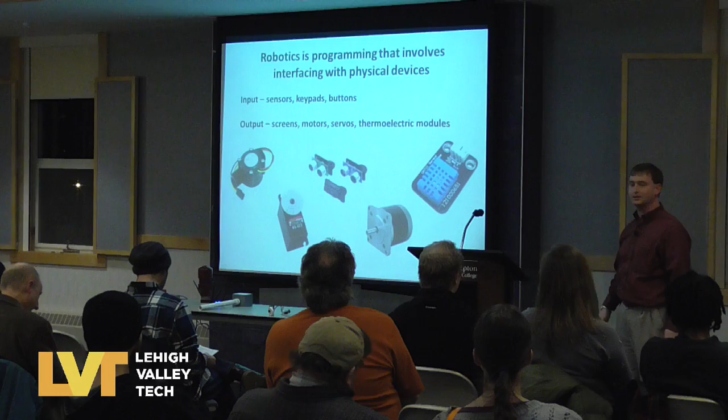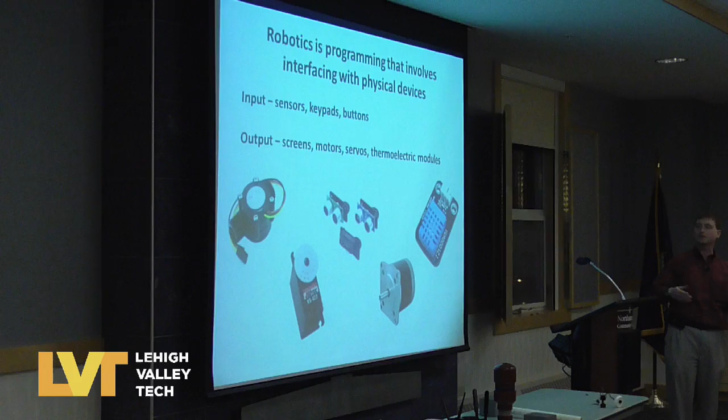So everyone a lot of times thinks of robotics as big arms in factories and crazy stuff moving around. But I like to think of robotics more as anything involving programming and interfacing with physical devices. So not only moving things around, but also sensing things as well. So on the screen here, for example, on the far left, that's actually a water flow sensor. In the middle, you have ultrasonic sensors.

Yeah, that might help. Thanks. No, you got a lot of those from the harp, right? Yep. All right.

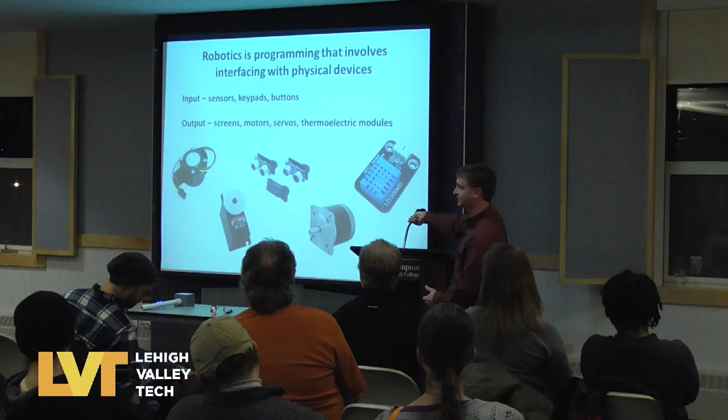This is actually a servo for moving things around, and this is a stepper motor right here. So you could do input in a variety of ways: sensors, keypads, buttons, getting data off the internet, and you can also output data in a variety of ways: screens, motors, servos, and I've actually used thermoelectric modules in some projects to keep water hot or cold.

So some applications, we always think of the robots in the auto factory putting together cars. You're doing the same thing over and over again. It's something that's very straightforward to program because there's not a whole lot of change involved from one car to the next. And you want very good consistency when you're in a manufacturing environment.

To something like the Asimo, where you got a little bit of artificial intelligence, some balance, a lot of different features and functions that need to be programmed in there, a little more complicated, responding to things on the fly. All the way down to smaller projects, such as this ultrasonic sensor that I designed to run low power on a set of batteries for a couple of years, and I actually have that sitting right up on the table. I can demonstrate that later this evening for you.

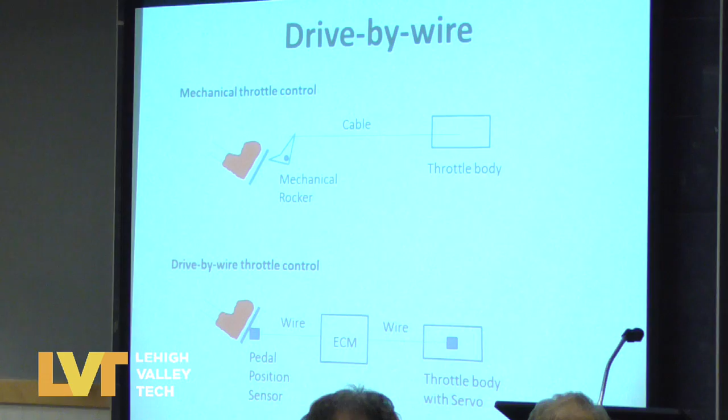And also for emissions control, you can change the opening and closing of the throttle body to change the way the engine's operating and make the operation a lot smoother. In case someone, for example, would stab the gas pedal, you can open up the throttle very gently instead of all at once and cause the engine to bog down or something goofy to happen.

Another interesting thing about robotics is the areas that you need to be an expert in. In traditional programming, you generally need to be an expert in computer software. And there are people that are great with this. Some people love programming 16 hours a day, getting very, very deep into it, doing one thing, and doing it very, very well. And I salute those people.

If you're into robotics, if you're the type of person that's maybe a jack of all trades, you do a little bit of each thing, a little bit of computer software, mechanical engineering, electrical engineering, microprocessors, and ethnography. Does anyone want to take a guess at what ethnography is? Okay. No? Ethnography is the study of people and how people do things and how people use things. And that's very important when you're designing anything, even when you're designing traditional computer software. You want to make sure it's something that people can intuitively understand and use, and it's not too difficult.

And the great thing about robotics is that you don't have to have a PhD in each one of these areas to be good. You just have to know the basics, enough to get by or to know what you need to look up to actually get something done. So in traditional programming, a lot of times the areas of importance you'll see: power, how many gigahertz the processor has, raw speed, security, redundancy, data encryption, and the user interface.

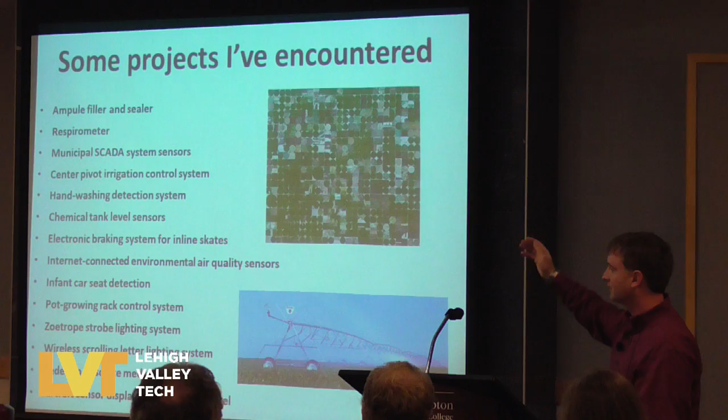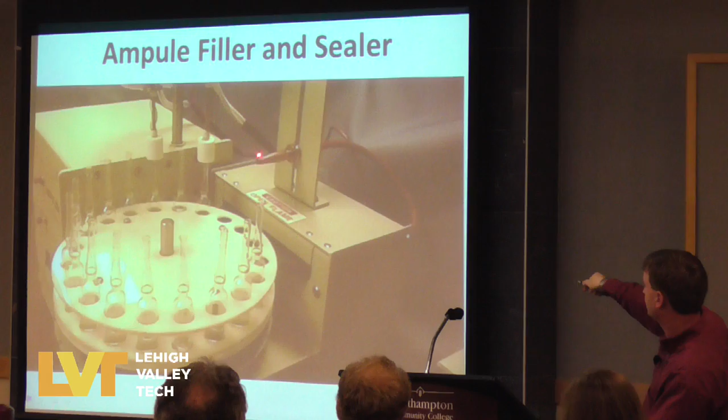Here's a video of the ampule sealer and filler. I'll just show it to you because it's much easier than explaining what it is. So these are ampules here. They're almost like test tubes, but they have very thin glass up at the top, and in a minute or two I'll show you there'll be a flame coming out of here, and the glass of those ampules will melt and form a hermetic seal.

This is the liquid filler and gas injection portion of the unit. So here's the liquid filler, and if it detects an ampule, it's going to push up the liquid filler and inject liquid into the ampules right before they get flame sealed.

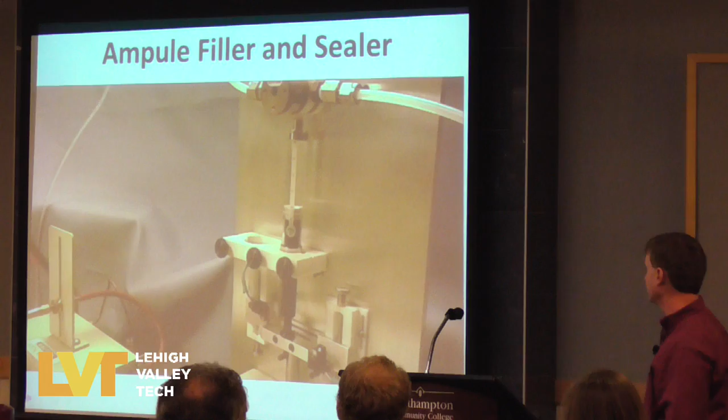And let's see, what's next here? Yeah, here's the flame. So they're forming a hermetic seal. If you notice, there's switches right here that detect if these guys have actually gotten onto an ampule, so that you don't go injecting liquid where there's no ampule.

And this is the base unit here, the one with the carousel rack and all the ampules. That has an Arduino board in it. This device here is used for purging gas, the one that goes up and down. The liquid filler's over here. The gas purge and liquid filler are getting Arduino boards in them as we speak. They're being redesigned for that.

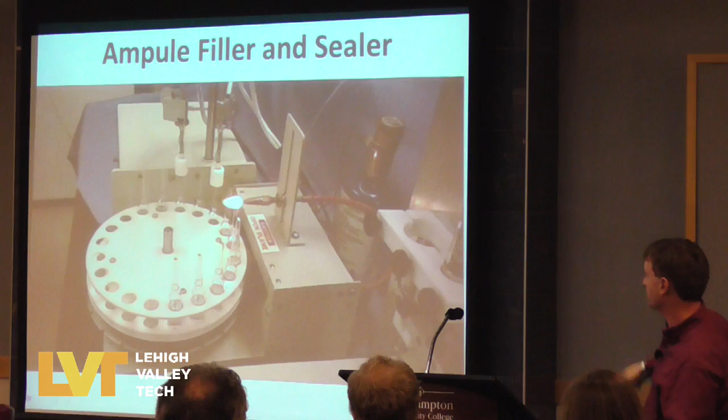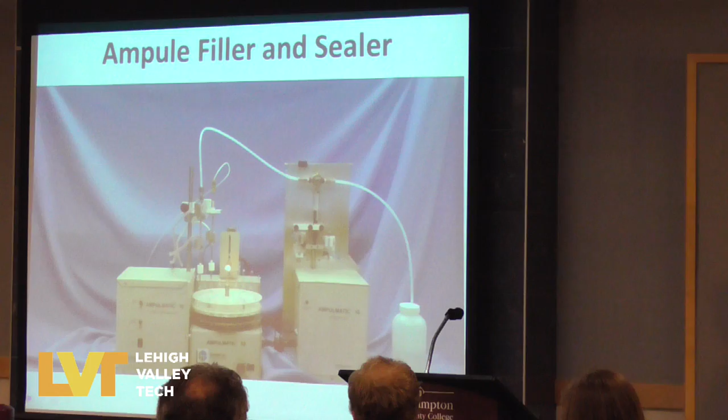But they're designed so that you can run either just the base unit here, and then you could buy the add-on modules separately if you like. See, there are cables going through them. And this is the whole thing in operation all at once. But the base unit is running on an Arduino using a very minor amount of the capabilities that the Arduino actually has.

And then there's my hand. Oh.

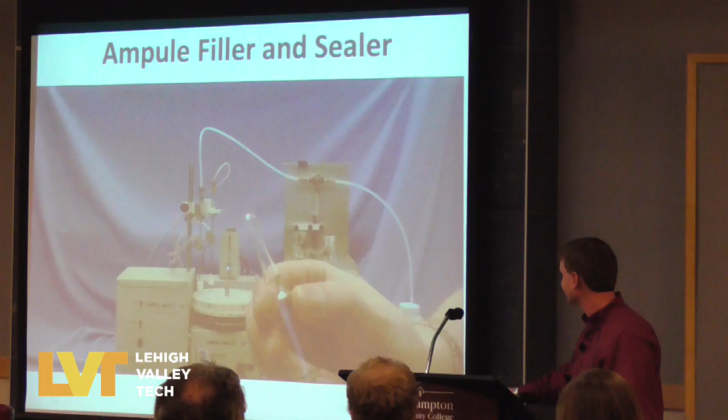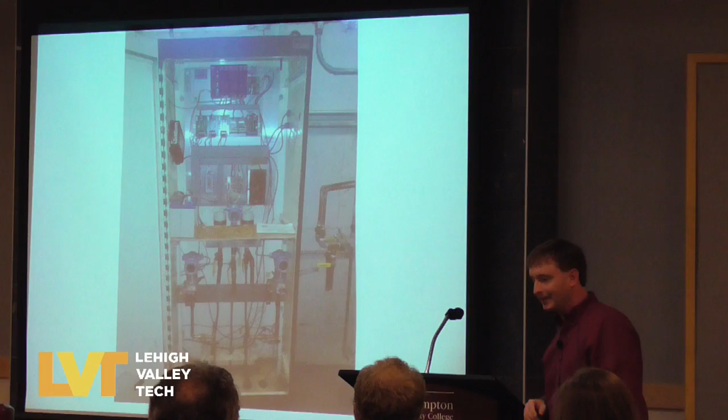And inside they have a PLC system to monitor the pressure and flow of their different lines. Some of their sensors are right here. So what we did was we built a board running on an Arduino Mini, which is right here, to monitor the current, because we want to compare what we can get for monitoring current with this little board here versus what they're getting with an expensive PLC system. And I have parts of that setup replicated up here.

This is going over Ethernet to a Cradlepoint device, and a Cradlepoint's a wireless device that you run on a cellular connection through AT&T or Verizon, for example, and then you can post data directly to the internet from wherever you are.

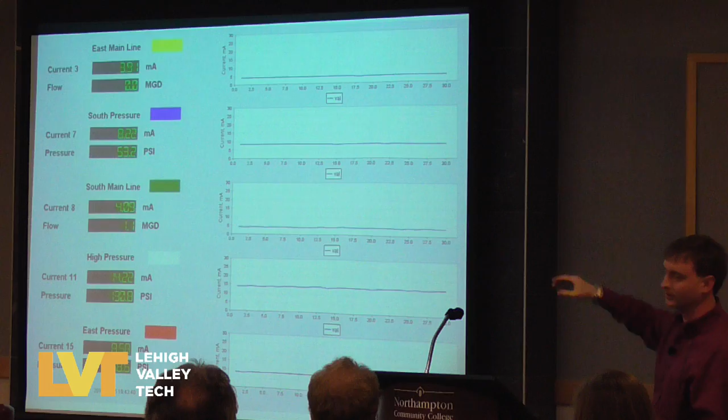And it looks a little better if you have an interface like this, so that you can see over time what's going on. You have a history, and it'll send out alerts if you need to, and make the appropriate reports that you'd like.

So the question is, why now? Why is now a good time for robotics? Why are we not talking about this 5 years ago or 10 years ago? And the reasons I came up with for why now is that the Arduino has become much more popular in the past couple of years because it's something that's very, very low cost. It's open source, and there's a lot of community support.

The microprocessors that they've been using, the technology's been around for years, but a lot of times, it was expensive to use in the past. The market was fragmented. Things were closed off, so you couldn't tell exactly what was going on. And it was very hard to find people who were actually using it, so there wasn't the support. You couldn't go ask a question as easily as you can with the Arduino.

And you combine that with the maker movement, 3D printing, and everyone wanting to build things. The robotics falls right in with that. And it's a rapidly developing field that can fill many unfilled needs based on some of the interesting calls that I get for projects. There's a lot of stuff that you can do now that wouldn't have made sense to do before because you're able to do things at a smaller scale and much lower price.

So a little bit about the Arduino. Has anyone here ever heard of or used the Arduino?

Okay, good. Some of the things that make it nice are, one, it's open source hardware. So you can buy the stuff already pre-built, which a lot of times makes sense, but the schematics are provided by the manufacturer if you wanted to build it yourself or if you're worried about the people who are making it going out of business. The IDE is open source and it's available on most operating systems. It's very simple to install.

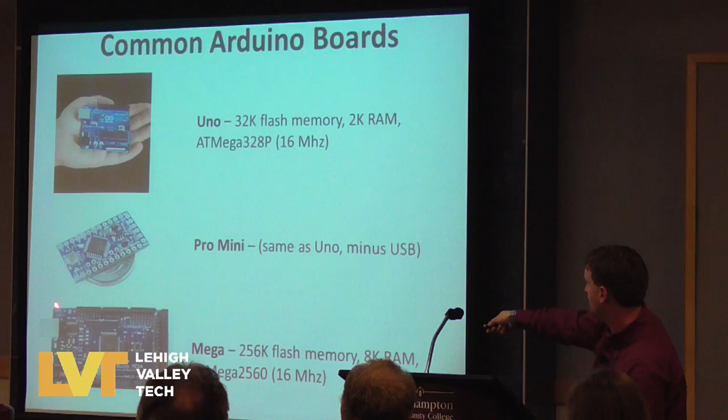But if you need more power, more inputs and outputs, more memory, you can go with a Mega. It costs a little bit more, it takes a little bit more power, but the opportunity's there. You see it has a lot more pinouts, and sometimes that's necessary. So here's a close-up of the Uno.

What you can do is digital inputs and outputs. So any one of these pins here, 0 through 13 and analog 0 through 5, can tell you whether any value coming in is high or low. You can do analog input on an analog pin. So if you have a voltage between 0 and 5 volts, it can tell you what voltage that is. It can do serial communication just like a modem with some libraries. So you can communicate with a whole bunch of different things, Ethernet boards, wireless boards, other Arduinos.

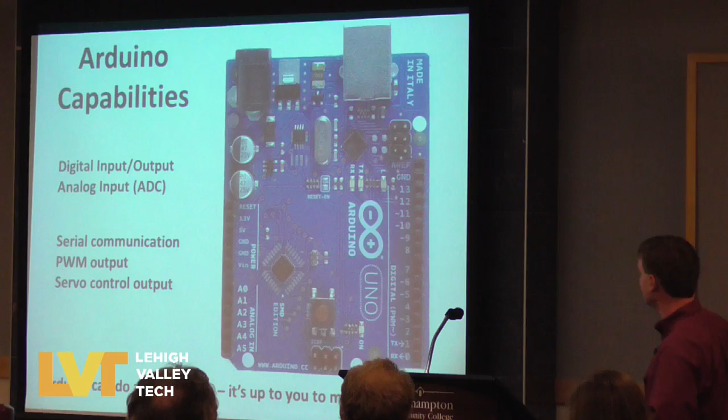Any of these pinouts with a little tilde in front of them, 11, 10, 9, 6, 5, and 3, can do PWM output, and I'll explain that in a little more detail later. And along with PWM, you can do servo control output to control servos. There's a timer in the microprocessor, a couple of timers actually, that control all the functions, making sure that the pulses happen at the right times and the serial communication happens at the right times, giving you that functionality. So it can do a lot of things, but it's really up to you to make it happen.

The Arduino community also has a lot of shields available to make it easier to develop. A shield is a board that matches up pin for pin with the Uno, and you can just slap it on and sandwich it on without doing any other wiring or connection whatsoever. And most of the time they have the drivers with them so that they're very easy to use. You don't need to write a whole bunch of code by yourself or deal with the very intricate communications of each of these pins to make things work. And the nice thing is, once you stack a shield on, you still have all the pins out there, so if you need to put other things on, it'll just pass right through to the baseboard.

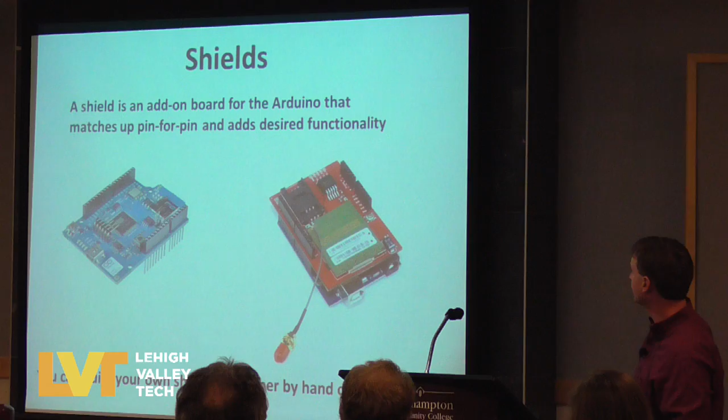And you can also build your own shields, either with a prototyping board if you like to do soldering, or if you have to do a production run of 10 or 20 shields, you can develop a PCB in free software, and either you can probably make it at the FabLab here in a CNC machine, or you can send it out to a place like PCB Express and pay your money, and they'll mail it to you in a week.

Other components you can interface with anything you want. If it's electronic, you don't have to buy special Arduino stuff. You can interface with relays, MOSFETs, solenoids, and the same sensors we saw on the third or fourth page: water flow sensor, ultrasonic sensors, infrared, servo, stepper motor, and the temperature and relative humidity sensor.

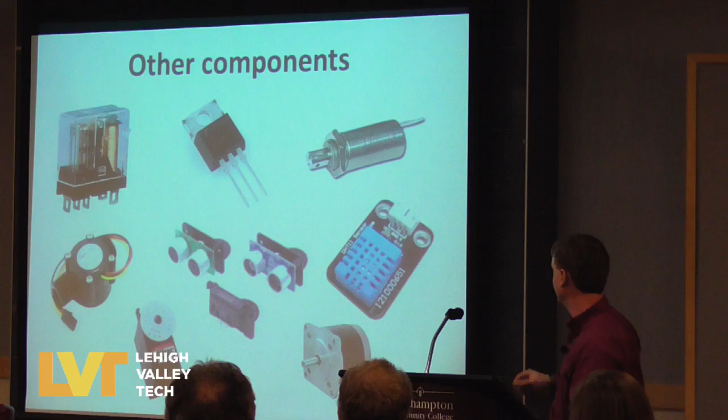As I said before, most of the shields, and actually a lot of components, have drivers available which allow you to just use basic functions that the manufacturer or someone in the open source community has already made, to make it very easy to get what you want out of the units instead of having to delve into the details. The nice thing is most of the component data sheets actually have the interface specifications on them.

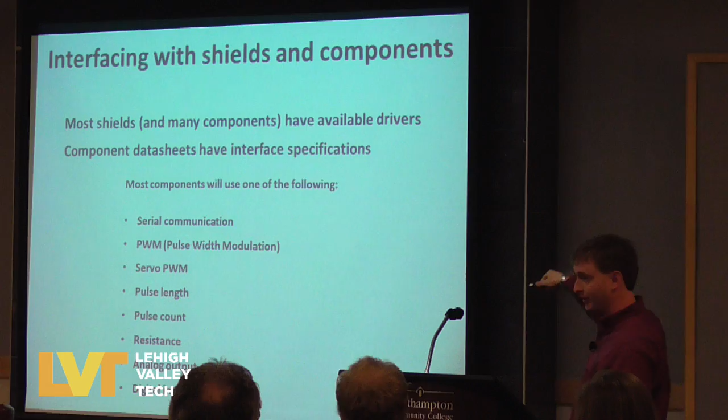Just about everything will use either serial, PWM, servo PWM, pulse length, or a pulse count, for example if it's measuring a flow, or like a Hall effect sensor for a wheel spinning rotation, resistance, an analog output, or a digital input or output. Like, for example, a button that's on or off will give you a digital I/O.

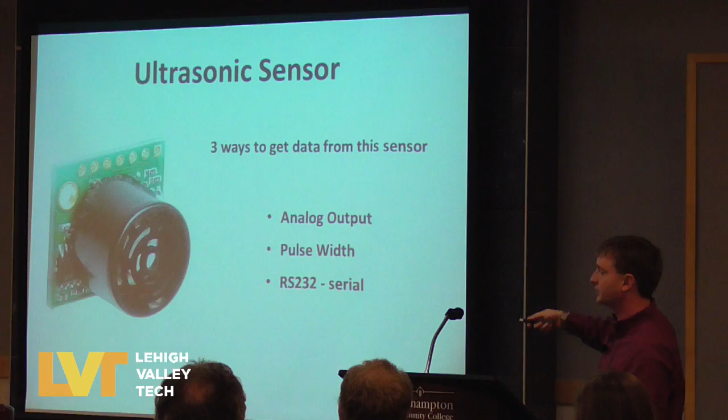One of my favorite sensors here, this particular ultrasonic sensor comes from MaxBotix, and it's actually the same sensor that I have here encased in epoxy. One of the neat things about this one is there are actually 3 ways to get data from this sensor. It'll give you an analog output, pulse width, or actual serial communication.

So here's an example of what the data sheet would tell you about the sensor. It says you got to provide power in, VCC. You'll hold pin 4 high to start sensing. Pin 3 will give you an output, a voltage. It'll level off at some point, say maybe 3 volts, and that'll correspond to some sort of distance.

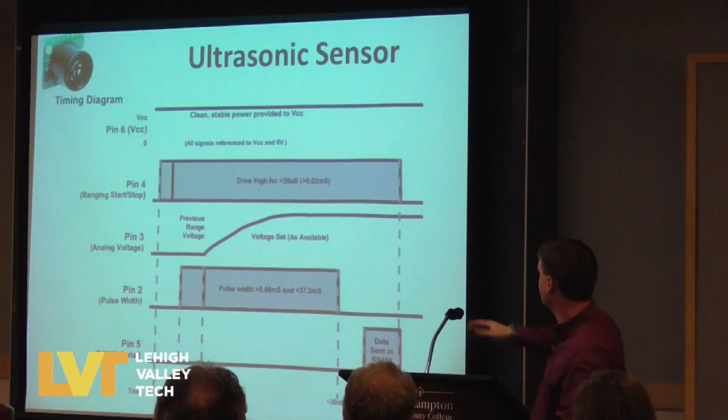Or if you read pin 2, you'll get an echo, and it'll give you a length, and the time that this is high corresponds to the distance between your sensor and what it's sensing. Or if you wait till it starts sending serial data, it'll send your data in serial format so you can read that as well. Sometimes you don't have any analog voltage and analog in pins left over, so maybe it's easier to use the pulse length. And sometimes you want to use the serial, if you have extra resources, or you want to make sure you're 100% accurate, because sometimes you can get a little bit of variation in the other two, depending on the timers or the voltages.

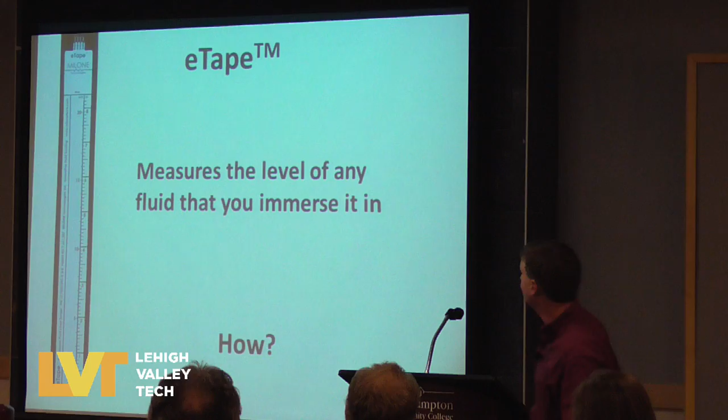Another very interesting sensor, definitely not developed just for the Arduino, is called eTape, and it measures the level of any fluid you immerse it in. We actually got some of it right here. This particular one is 12 inches long, but they can print it in any length they want. This is actually 3D printed. So the question is, how does this work?

The eTape has 2 resistance elements in it. It has a reference element because resistors can change their resistance depending on temperature, and you could be using this in a wide variety of temperatures. Then it has a sensor element, which is a resistance that changes with the fluid level. The data sheet tells you that if you sense the resistance, for example, as 1.5 kiloohms, that corresponds to a liquid level of 5 inches. So you just dip this in water, measure the resistance, and back calculate how deep the water is.

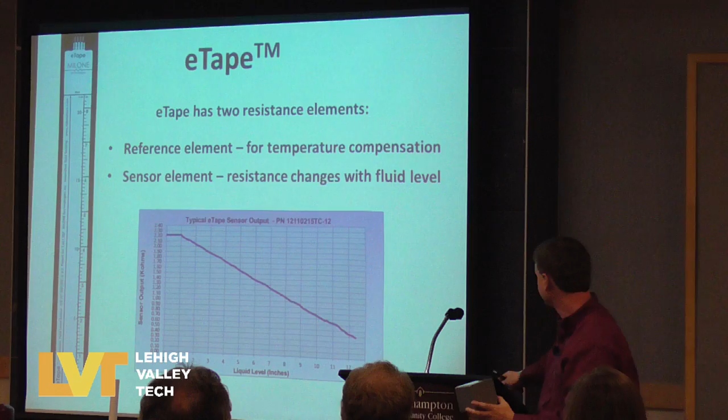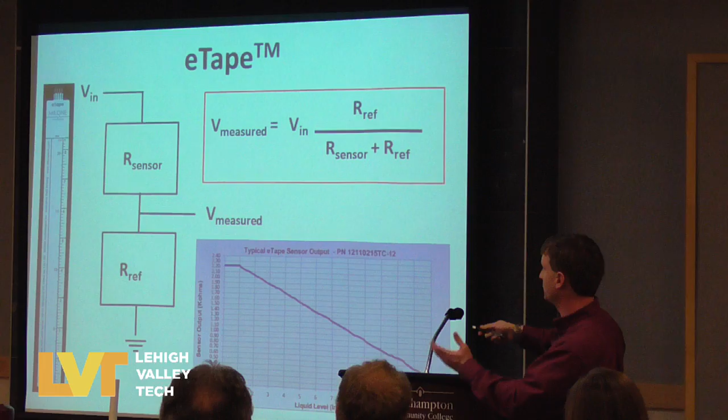Here's an example of a schematic you might use when building electronics for it. This is a very simple voltage divider. There are many ways to do this, you can use op amps, you can use Wheatstone bridges, but this is one of the simplest things you can do. That relates to this equation here: you know your reference resistance, you know your Vin, you measure V measured, and based on that you can calculate what the sensor resistance is, then go back to this graph and figure out what your liquid level is.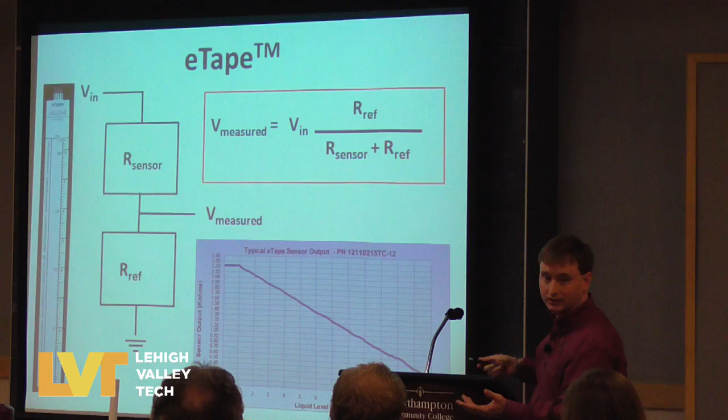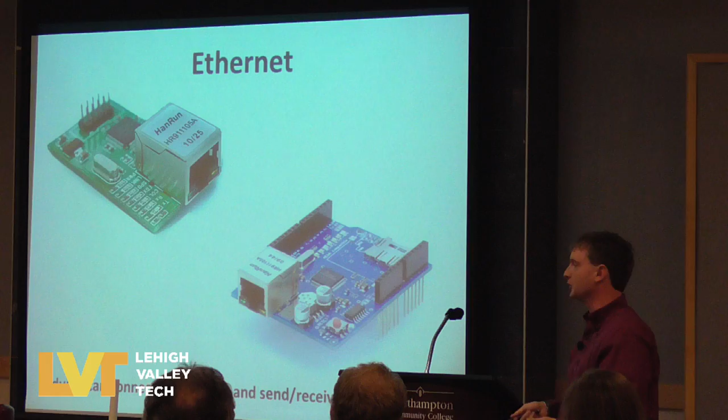You can also hook up to Ethernet LANs really easily by using a module like this or a shield, about 10 or 11 bucks. The official Arduino shield's a lot more expensive, but has room for an SD card and is a bit more capable. So you can connect to your LAN and the internet, send and receive HTTP requests. If you want to put data on a database or look up data on the internet, you can do that with one of these.

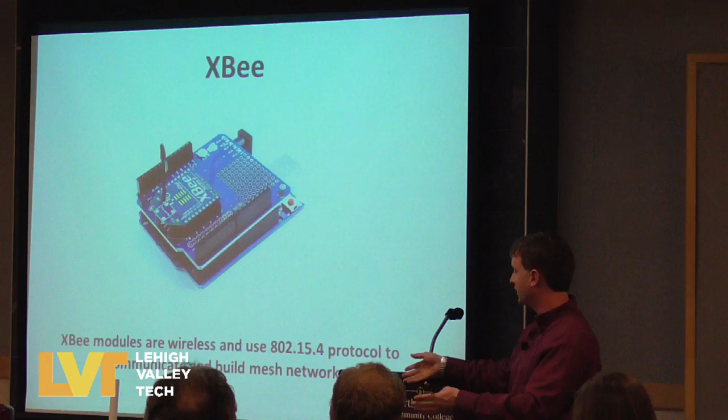If you want to do wireless communication, you can use something called an XBee, and I have one right here on this wireless sensor. Little shield, looks kind of like a blue stink bug, but not as bad smelling. It uses the 802.15.4 protocol to communicate, and you can build mesh networks. These guys can go about 300 or 400 feet line of sight, but if that's not enough, you can put a repeater, another XBee, and start hopping to build a mesh network with up to 10 hops. So you could have them go throughout the whole building, each communicating with the next one it can reach, and the data will still make it back.

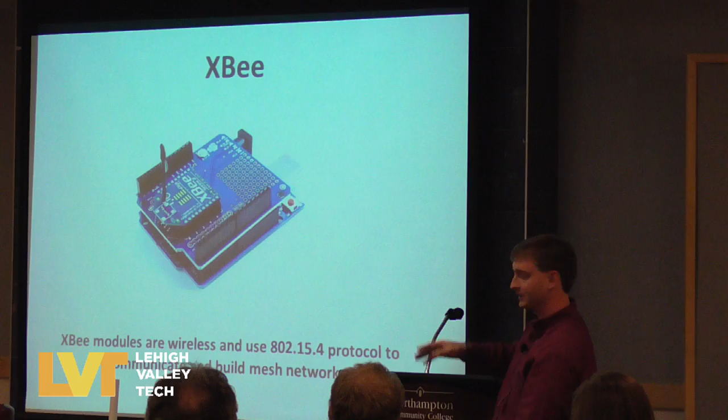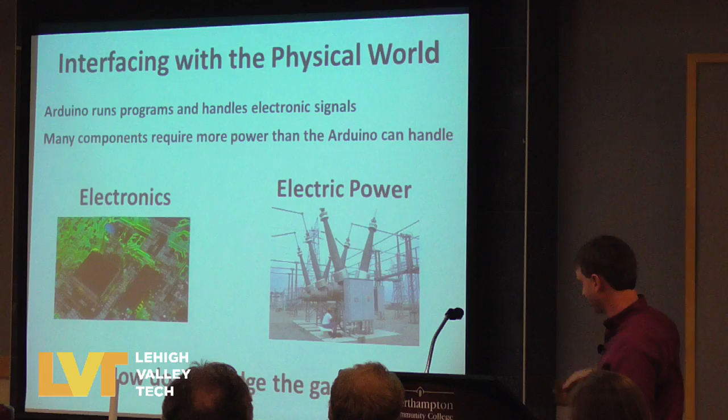For example, one of the things you might want to control is a brushed DC motor, and we all know these take a lot of current. This one actually comes out of a truck or bus - it's a windshield wiper motor - and you've got a linear servo here and other pretty hefty motors. So if you can only put out 40 or 50 milliamps on a pin, the question is, how do you control the 10 or 15 amps you might need for a motor?

One of the things they've come up with to do this is called an H-bridge. Each of these guys here is actually called a MOSFET, which is basically a fancy transistor - a switch you can turn on and off really quickly. It lets a lot of current flow through but takes a very small signal input. They're very inexpensive, very easy to come by, and very easy to use.

So let's say we want to control this motor here. If you've played with motors before, you know if you hook up a voltage one way, the motor spins one way, and if you reverse the battery, it spins the other way. I'll show you how we can do that and control the speed. If we turn on Q1 and Q4 at the same time, current flows that way and the motor spins clockwise. If we turn on Q2 and Q3 at the same time, current flows the opposite way and it turns counterclockwise. So we've already got both directions there.

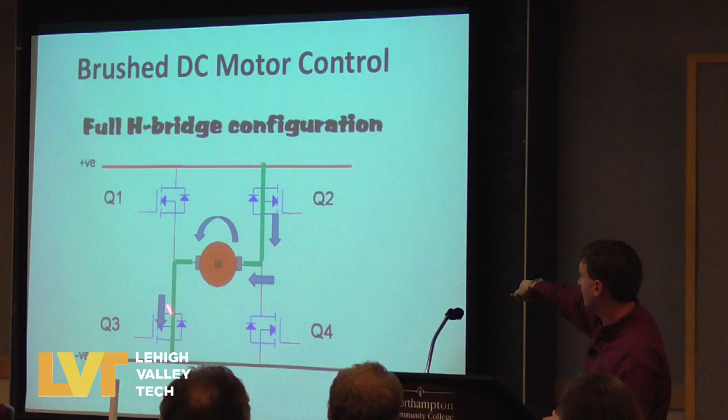Then to control the speed - because having a motor run at full speed is nice, but it's useless for other applications - what you do is turn these MOSFETs on and off really, really quickly, which is called pulse width modulation. You're turning them on and off hundreds of times a second to control the speed of the motor, because if you're not giving it full power all the time, it runs somewhere between 0 and full speed.

So further explanation of what PWM is, it's pulse width modulation. And for any given PWM signal, you'll have what's called a duty cycle. The duty cycle is the percentage of time at any given pulse that you're up at the top here, up at 5 volts or high.

As you can see here, at a 0% duty cycle, you're never at the top. At 25%, you're here a quarter of the time, 50% half time, 75% most of the time. And if you're at 100% duty cycle, you're at 5 volts the whole time.

Another important thing about PWM is the frequency, which is the amount of time in between pulses. It's usually better to pulse faster, because then it'll be a little bit smoother. But the issue is sometimes your control system can heat up if you pulse it too fast, because switching components will have a little bit of hysteresis in them.

So if you had a 0% duty cycle, those motors wouldn't be turning at all. They'd be running slowly here, a little bit faster here, almost full speed here at 75%, and 100% duty cycle will get you full speed of the motor.

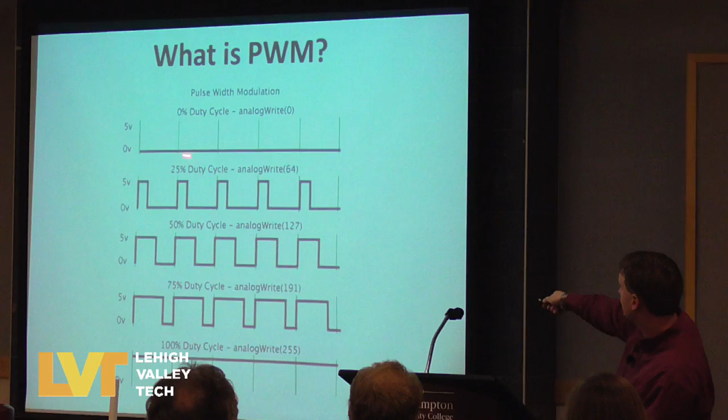So that, in conjunction with an H-bridge circuit, will get you forward, full backward, and any speed in between on a brushed DC motor. These PWM signals are just electronic signals, very, very low current, almost none at all. So the Arduino can put out the signals necessary to control the MOSFETs to get you what you need.

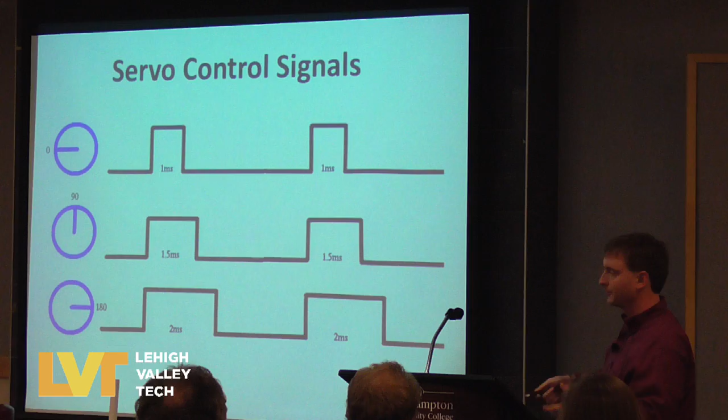Servo control signals are very similar, except you have a pulse width length here. It's not so much a duty cycle as a time, and the length of the pulse width corresponds to the position of the servo. So the longer it is, the further turned the servo is. That's the slight difference between a servo control signal and a PWM signal. But a lot of motor controllers actually use servo control signals for brushless DC motors, for example. That's something else there are libraries in the Arduino to help you with.

Typical control systems, one example would be a thermostat. A lot of times your heating or cooling system in the house is either full on or full off. There is no in between. So you'll set 68 degrees. You'll see maybe it's red, your house is cooling off, and then green, your house is heating up, cooling off, heating up, cooling off.

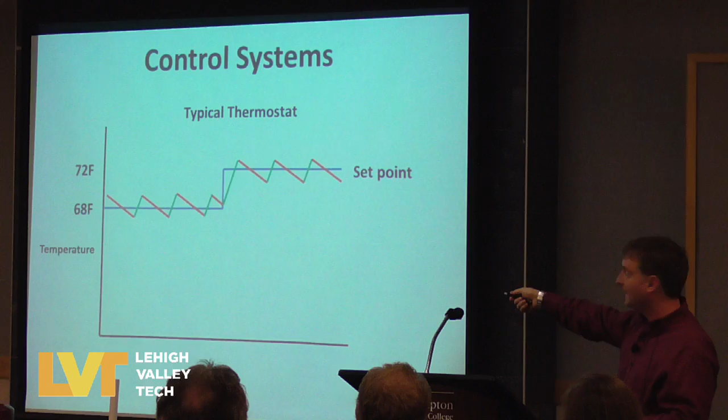And then someone comes along and says, I want it to be 72, so it heats all the way up to 72. A lot of people like to, when they want to warm it up, turn the thermostat up to 85. That doesn't help at all because the heater can only work so hard, no matter how high you turn it up. This is probably acceptable for a house or building keeping it at a temperature, but if you were doing something like a cruise control system in a car, you'd get sick pretty quickly doing this.

So we came up with something a little better, called a PID loop. As you can see, a PID loop produces a much smoother response to a step change input. For example, if your car is at 35 miles an hour and you have the cruise set to 70 and you hit the button saying you want to accelerate back up again, these are the possibilities it could do depending on how your PID loop is set.

It's called a PID loop because you have a proportional term, an integral term, and a derivative term. The proportional term looks at how far away your actual signal is from where you want to be and compensates based on that.

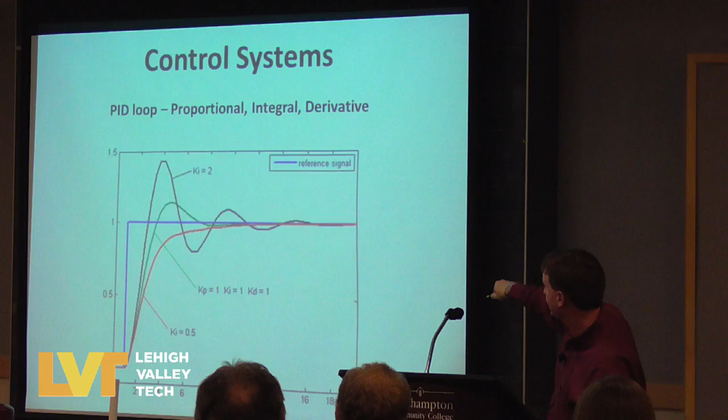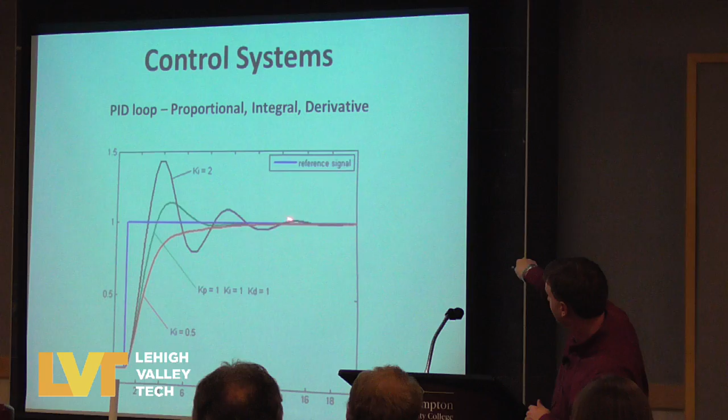The derivative term will kind of soften the landing. It compensates based on how fast you're approaching where you want to be, so if you're approaching really fast, it'll slow you down. And the integral term integrates the area under the curve, and if you're very close to where you want to be but not quite there, that'll bring you back. These are all gains that can be set depending on how you want the system to behave.

We'll go more into that if you take one of my classes. It's too tough to get into it in depth in a short presentation like this, and it would probably bore everyone to tears. But if you want to see the mathematics, one application for this is the thermoelectric modules that you can control.

If you can control something from very low range to very high range or anywhere in between, unlike turning a heating system on and off, but you can do it part way, you could use a PID loop to turn it on part way and keep your temperature maybe at exactly 72 instead of somewhere between 71 and 73.

And if you have a vehicle that has one of those electronic automatic climate control systems and you set it to 72 or 75, this is the type of thing we'd be using there, because in a vehicle you've got all this excess heat from the engine, and so you can control: I want full heat, or I want part heat and part fresh air. So you can be doing full heat into the vehicle all the way down to just a little heat or even air conditioning if you want.

So once again, anyone ever seen anybody with these automatic climate control systems in their vehicle and it's 20 degrees out in the winter and they turn the thing up to 85 degrees? It's not doing them any good, because if it's 20 degrees inside the car and it's set to 85, the climate control system already knows that you want it warmer and it's very, very far away from the temperature that you'd like. So even if you just leave the thing at 72 degrees, which is where you want it to be, it'll heat up just as quickly.

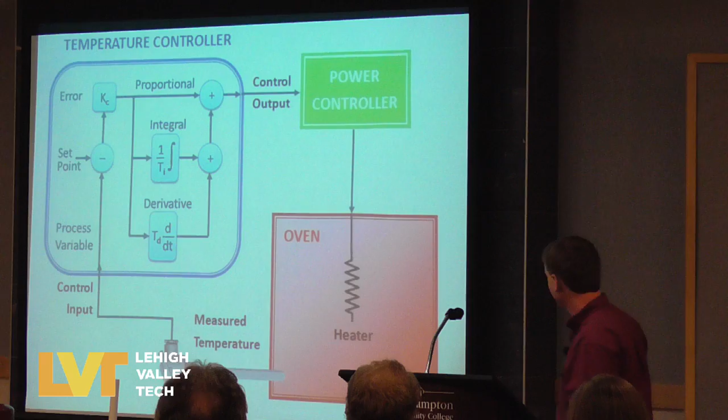Another thing that's very important when you're dealing with robotics, just like really any field, plumbing, being an electrician, or even in the medical field, is having the right hardware. It makes your life a lot easier to have a good soldering iron, the right wires, multimeters, power supplies, screwdrivers, any kinds of tools, just like being an auto mechanic. It's very frustrating, and that's often the one thing you need if you're trying to hook things together. If you have access to all this, it makes your projects go much more smoothly. Otherwise, you're sitting around trying to order all the time.

And one of the nice things about having the FabLab here is that all this stuff is available downstairs. We just got a lot of it in, and it's going to make projects a lot easier if you don't have all this in your basement or something already.

So some of the things that Arduino is great for: prototyping, because now it's very cheap and easy to get into it. You can build something very rapidly, very cost effectively. There's a lot of help available. Experimentation, likewise. Data logging, because you can do it cheaply. Low volume production. People often ask, is Arduino actually used out in the field in production items? Yes, it's actually used in the ampule sealer, and that's a very high dollar item out there.

We haven't had any issues at all with the microprocessor. I have no reason to believe that microprocessor is any less reliable than any other microprocessor out there, as long as you meet the operating conditions on the data sheet. You can replace PLCs, and you could do wireless communication and internet, which was a lot tougher back in the day.

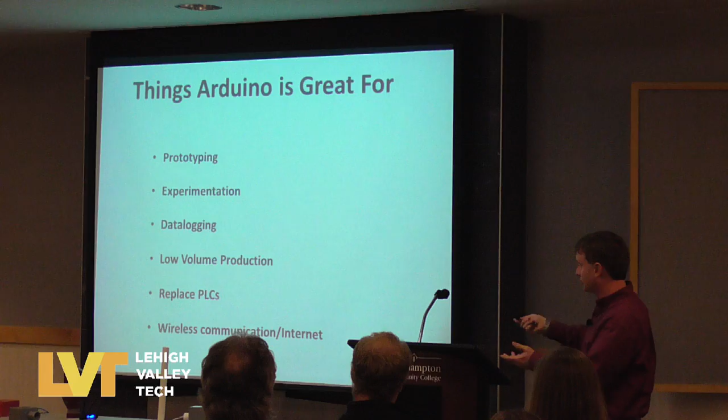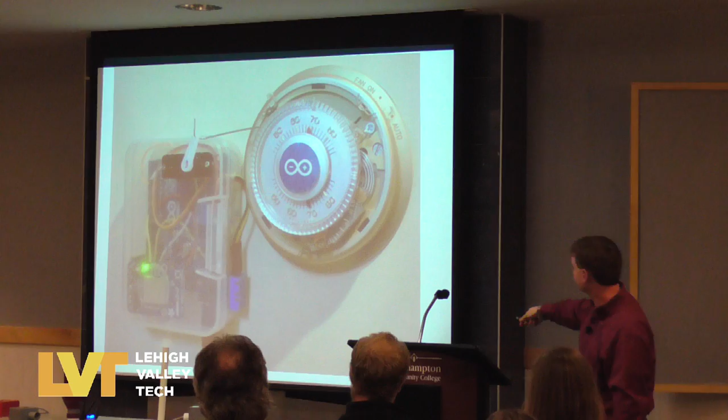So some of the cool projects I found that people have done: someone was trying to replicate a Nest, or maybe this was possibly a precursor to the Nest. You have an Arduino here, the servo controlling a thermostat, and a temperature sensor here. Someone else built a sump pump monitor to see how often their sump pump was running, and they got a logger file here with their SD card, so they could take that, put it in their computer, and tell if that was overactive. It's a lot of wiring they've got there.

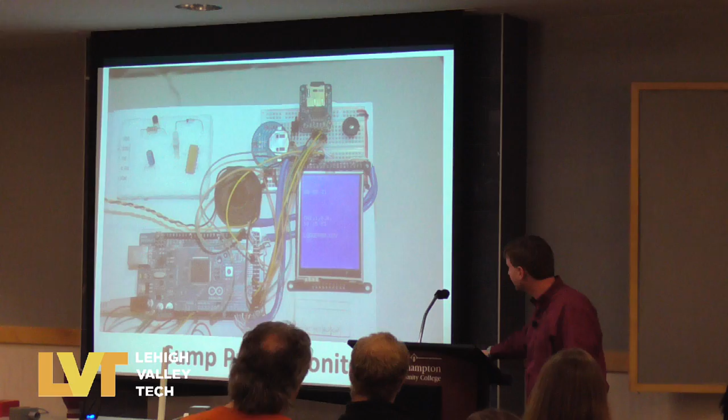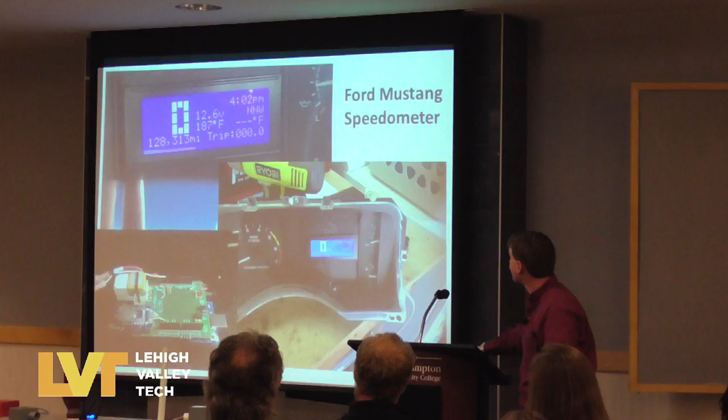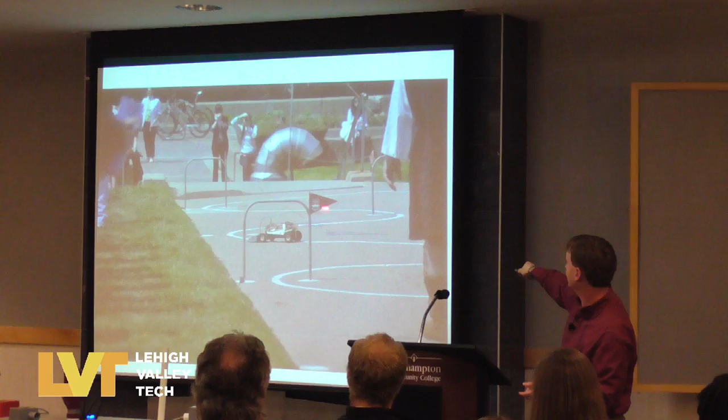But the other thing is down at the bottom it gets a little more complicated because you see they had extra lines there and there's certain gates you've got to go through. So you can program which gates you've got to go through. But the car has to make a couple of decisions and the goal is not to hit the flags.

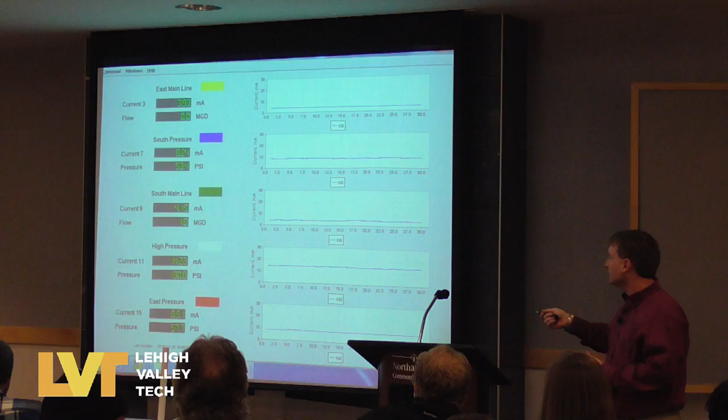So on the East Main Line here and the South Main Line, we're measuring millions of gallons a day in flow. And on the south pressure, high pressure, and east pressure line, we're measuring the pounds per square inch in the line. Now we're using the standard 4 to 20 milliamp current sensors that are out there in the field because they're already out there, and we want to use the best sensors available.

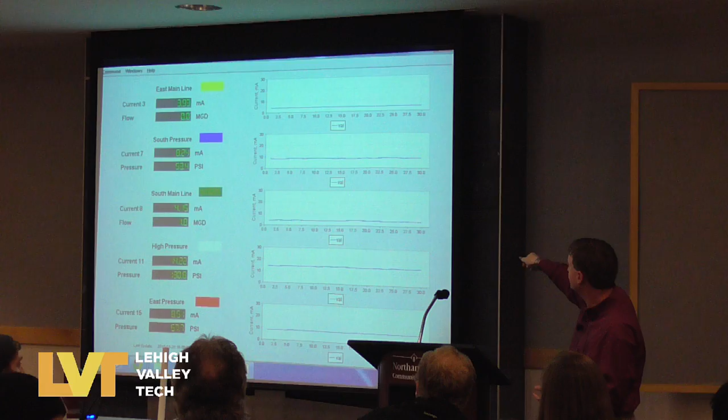And we're not necessarily trying to replace the sensors because they have sensors in place, but those sensors will put out a current we can measure that we can correlate to the actual values that they're getting. And the thing is, these lines should be pretty consistent because they're not supposed to be changing that much.

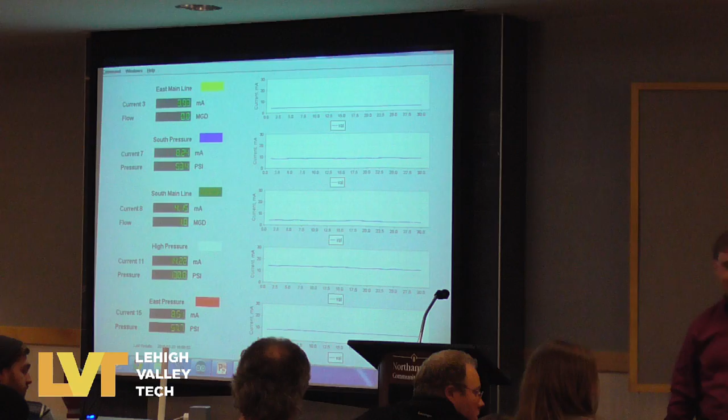A couple other things I can show you here. You can pass this around if you want. So what that is, is a very low power ultrasonic sensor that I built for someone, the guy in Boston actually, for measuring chemical tank levels. And that would actually go into this here. So this is the case for that.

You'd screw this into the top of the tank. You'd have that in it, and the ultrasonic sensor would send a ping down and hear the echo back, and you'd be able to tell how much liquid was in the tank. And the reason he wanted me to help him was because oftentimes he was filling a lot of tanks in one area. Each customer would have 3 to 5 tanks, and the device that he was using, every one had a cellular unit, so he was paying communication on every single unit.

But if you have several in the same area, that's got an XBee on it, one of those wireless devices, and you can go to a base station like that red box there and aggregate that all through either one Cradlepoint, one cellular internet connection, or even straight Ethernet out the building if you have a cable or DSL modem or some other internet connection, and you're saving all that communication cost.

So that's designed to take a reading every 2 hours and last 2 to 3 years on a pack of 3 AA batteries. So that's one of the sensors that I brought. We can actually activate that. This here is the E-tape that I showed you. And then this here is another ultrasonic sensor. This is just in a NEMA box, and this is weatherproof, so this will hold up better outdoors instead of inside a chemical tank. But this is a much more expensive sensor than that one, so I bought fewer of them.